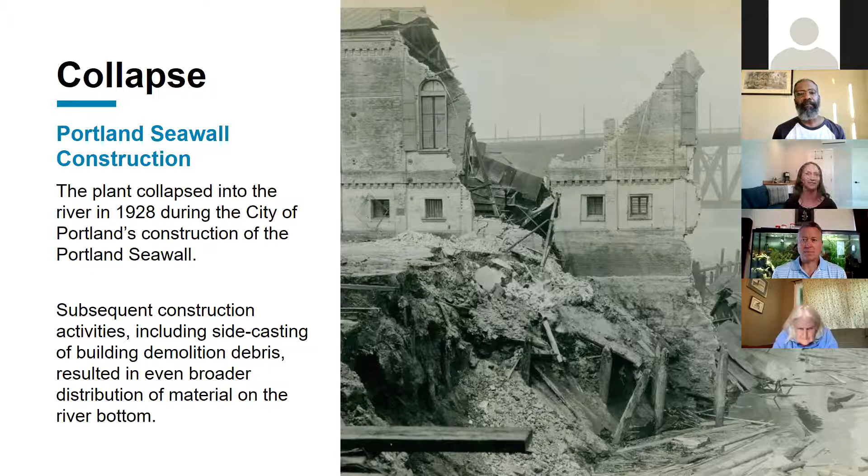And it was just left there over time.

So now I'll go into a little bit of the DEQ selected remedy and permitting. Following all those investigations to look at nature and extent, DEQ reviewed and considered a variety of different cleanup options to address contamination at the site, and ultimately issued a final cleanup plan, or record of decision, in November of 2016. The selected remedy is shown here in this figure, and it's a bit unique in that it involves a blend of a variety of different remedial technologies.

It addresses the most highly concentrated sediment contamination and tar deposits through removal and capping. These are the areas shown in red, pink, and orange. Red was full removal. Pink was removal of that tar body material and placement of an amended cap. And orange was dredging to allow for placement of an armored cap.

It also incorporates in situ treatment in a couple of areas, one being the depositional area along the seawall shown in green, and also an offshore area where surface concentrations were fairly low but some buried contamination did remain - that's the area labeled D, offshore. And then it also relies on, or enhances, natural recovery that's ongoing, which has been happening for many decades here.

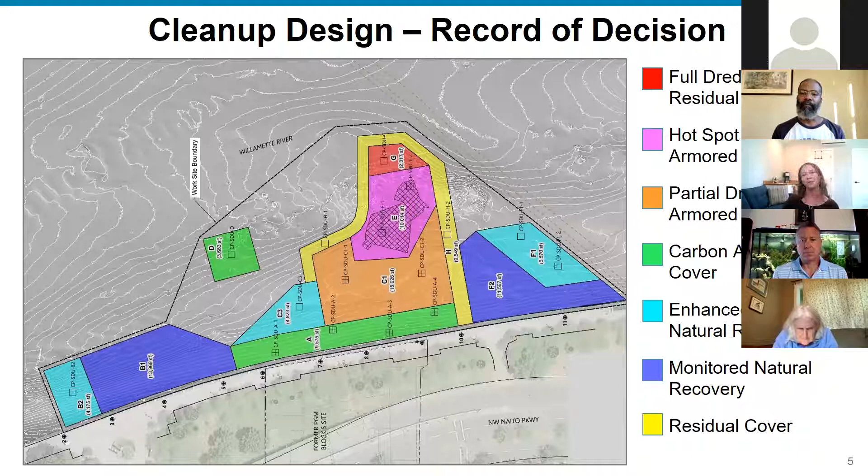So once DEQ selected a remedy, we go into the design phase. This is where Northwest Natural and their contractor spend a lot of time working with their engineers and technical experts to prepare detailed design drawings, specifications, and reports that outline exactly how the remedy will be constructed. I don't expect you to be able to read all the tiny print on this cross section - it's kind of challenging - but it's just one example of what you might find in a design report, and I think it does a good job of highlighting some of the key considerations that had to be accommodated in design.

As we talked about, on the left we've got the seawall. It's an old historic wooden seawall owned by the City of Portland, and the condition was unknown, so we had to avoid disturbing it during construction. There's significant sediment deposition along the wall that can be relied on because it effectively works as a natural cap in that area - you can see that steep slope starting from the wall and going down into the river.

And of course, you need to make sure the remedy provides sufficient draft for Fleet Week vessels - you need to still allow those vessels to come and go and berth as they have for a long time now on an annual basis. And due to the presence of the surficial tar deposit, it was a priority to make sure all of that material got removed. It's a little hard to see, but there's an area down in this third panel at the bottom where you can see a gray surficial line showing where that tar deposit is.

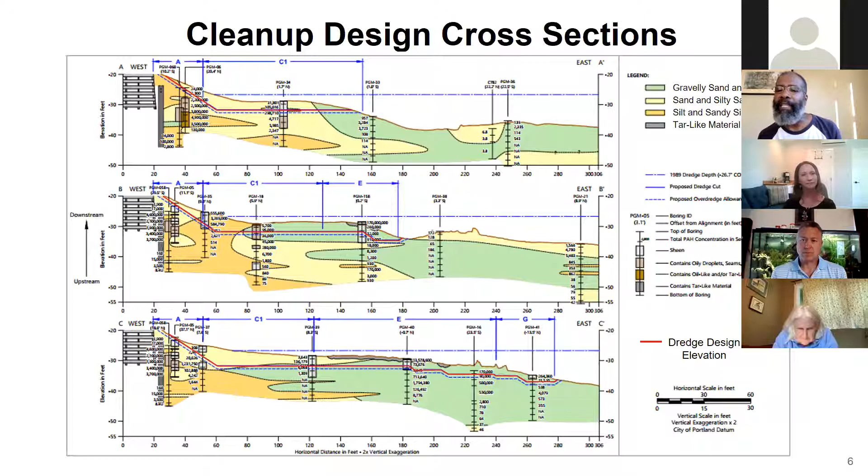And then there was one more question about what caused the collapse of the building in the previous photo, the earlier photograph. Was there any knowledge on what caused that collapse of the building?

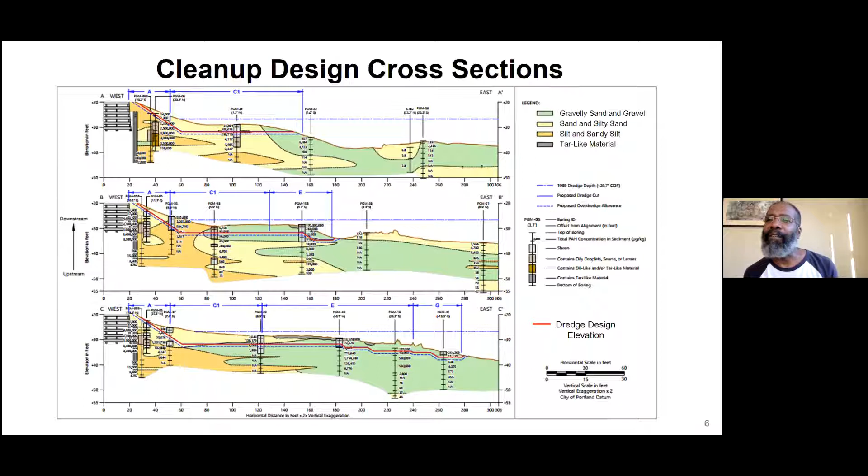Yeah. When they dug the foundation for the seawall, they dug into the bank, and structures that were on the bank at that time basically were demolished and fell into the river. And those structures just kind of stayed in the river, more or less. We have some interesting photographs from divers that were evaluating the site before the cleanup that showed parts of walls that still had windows in them that we could match to the photos when they were above ground. So I'll show you some pictures of some debris that we took out a little bit later in the presentation to give you a sense of what was down there.

Fantastic. Thank you so much. Thanks, Sarah. Thank you. All right.

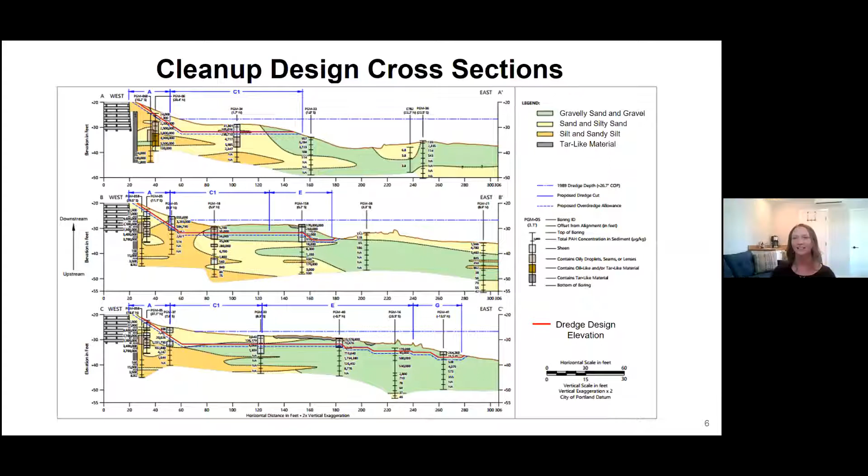And then that's kind of the active treatment portion of the cap. And then of course you need to make sure that cap remains in place over time. So it was overlain by a minimum 1 foot armor layer, which in this case consisted of stone with an average diameter of 3 to 4 inches. That stone was designed to ensure the material stays in place when subjected to a variety of different forces, including high river flows, vessel wakes, and it also considered movement from seismic events.

So DEQ finally approved the complete design package in October of 2019, and that really kicked off the permitting process, which is a really complex, multifaceted process that's critical to getting your project into construction. It requires coordination with a variety of different permitting agencies to make sure that work complies with federal, state, and local requirements, particularly for the protection of cultural resources, historical resources, water quality, endangered species, public trust uses, and future land uses as well.

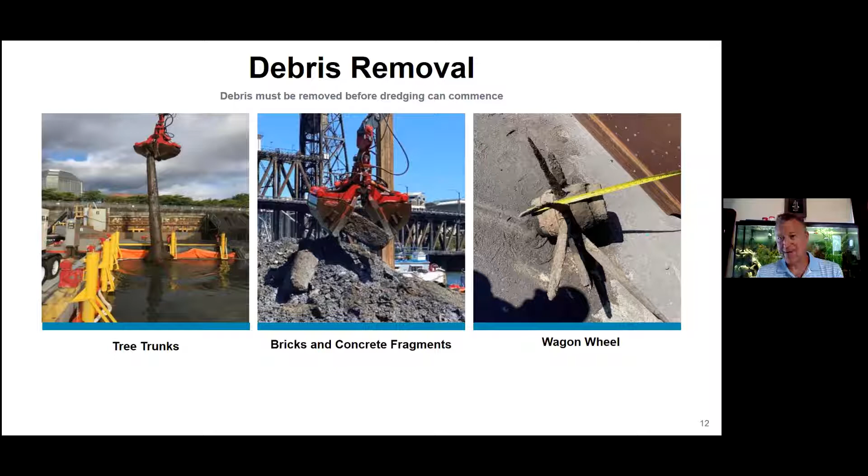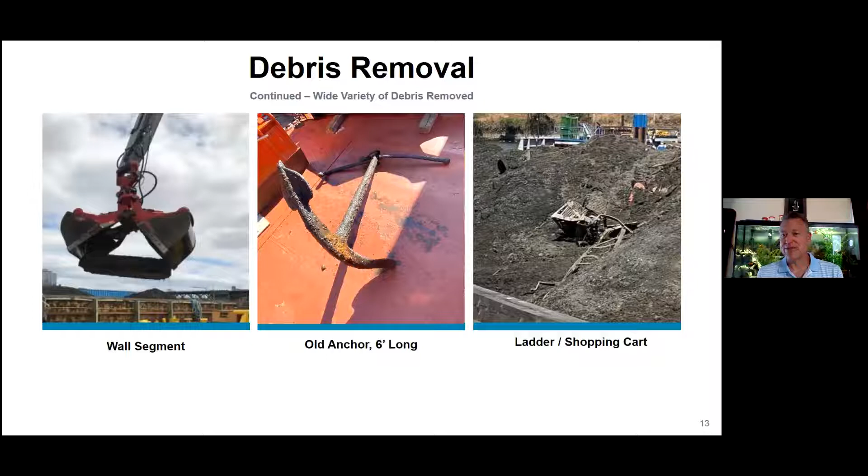On the left here, you can see a portion of the wall—that's one of the walls we were able to retrieve intact from the bottom. We also found an old anchor, and there was a lot of modern debris too: ladders, shopping carts, bicycles, and things like that. We even found an old safe that was open.

When we were doing work, several times a day we would collect water quality samples in the downstream or down current direction. Sometimes that was towards the Columbia, sometimes towards the falls, but we always knew which way the river was going, and we compared results against the background station at the time. We were very successful with that water quality program. We had no water quality issues at all during the entire project.

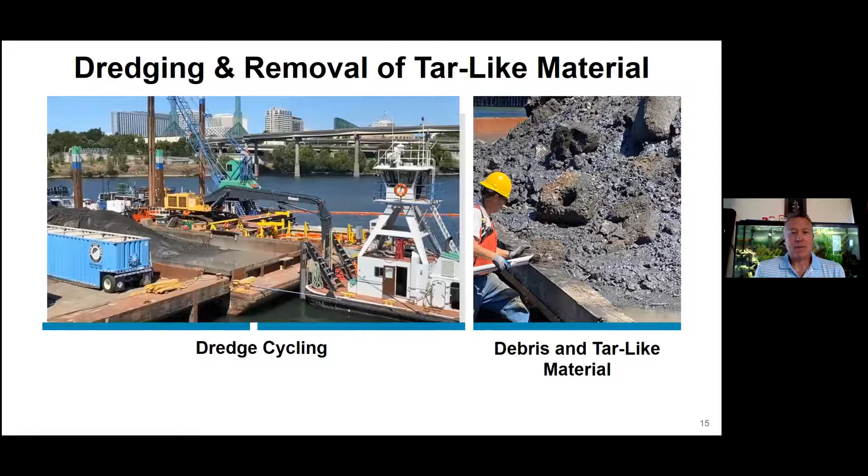We had a surprise, and this happened just a couple weeks after we started work. One of our operators was out in the morning after our first day of dredging and found some ammunition laying on the moon pool platform. We paused. We needed to find out what it was. It turned out to be World War II munitions, and that was unexpected.

We had to identify what type of munitions they were, and determine whether or not we could continue to work safely, both as operators and from a public safety perspective, before we could resume any work. So we worked really closely with Sarah and her team at DEQ to try to figure out if we could keep going on this project.

These were 20 millimeter rounds and a rifle bullet. You can see two 20 millimeter rounds and the bullet to the right of those. Turns out, as we were dredging, we encountered both practice rounds plus high explosive rounds, as well as incendiary rounds.

After some research, and bringing in some experts in munitions, we determined that these rounds had the potential to have an explosive fragmentation range of about 73 feet. Before we could resume work, we had to make sure we were safe working within that distance and had set up controls to make sure nobody else could come closer than that distance.

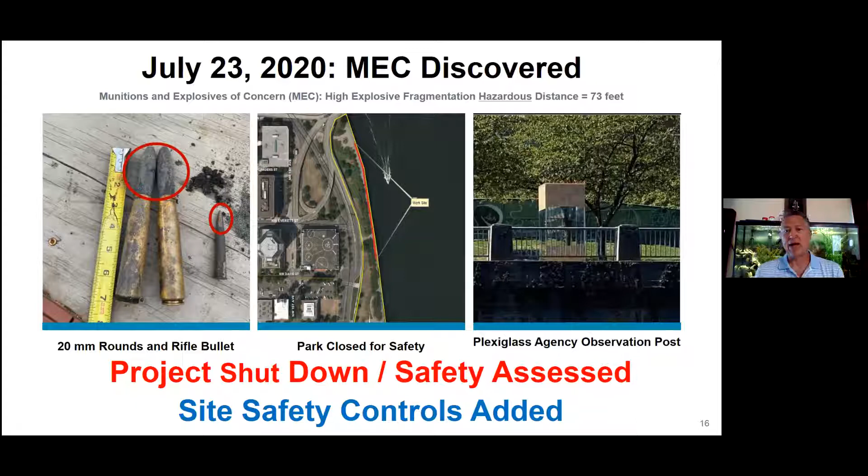But then there was another aspect we had to manage too. Sarah, you can move to the next one. And that's, what do we do with the munitions? We're not allowed to take sediments with munitions into a landfill. Landfills can't accept munitions - there's very strict regulations about that. So we had to sift all of the material that we dredged to make sure there were no munitions in them.

Because some of those 20 millimeter rounds were separating the bullet from the casing, we had to sort and sift all of the dredge material down to 3/4 of an inch. So we had to set up an entirely new station. We did this on the Columbia River on the North Shore, and this was a fifth station that we constructed for this operation.

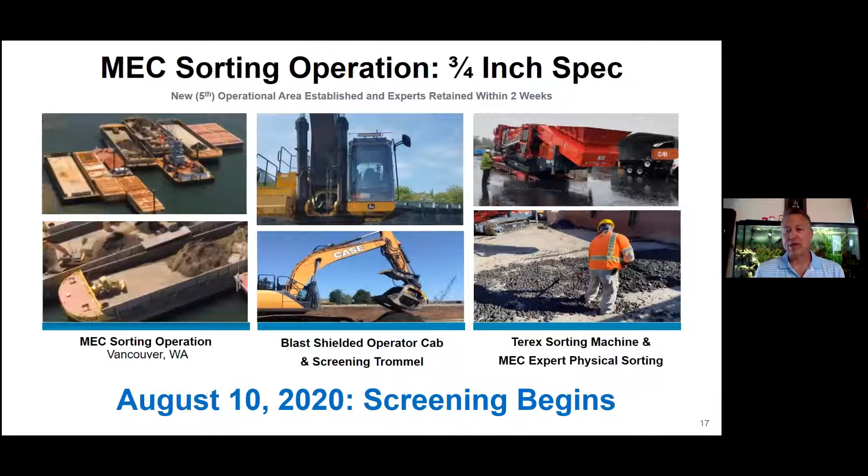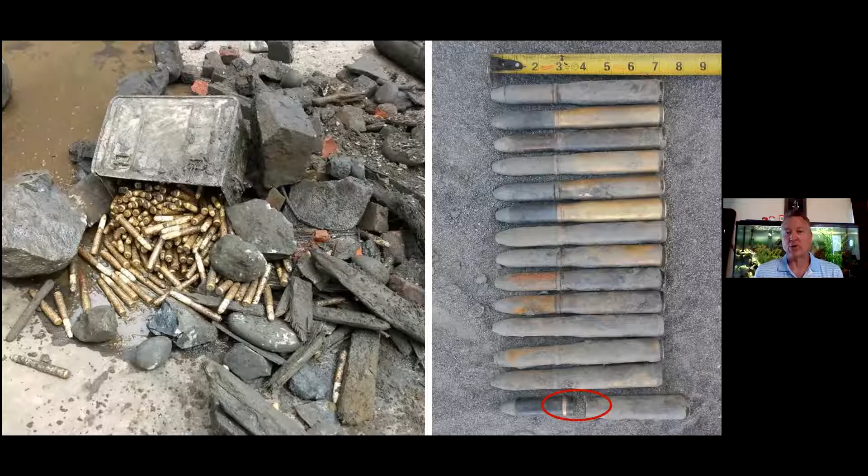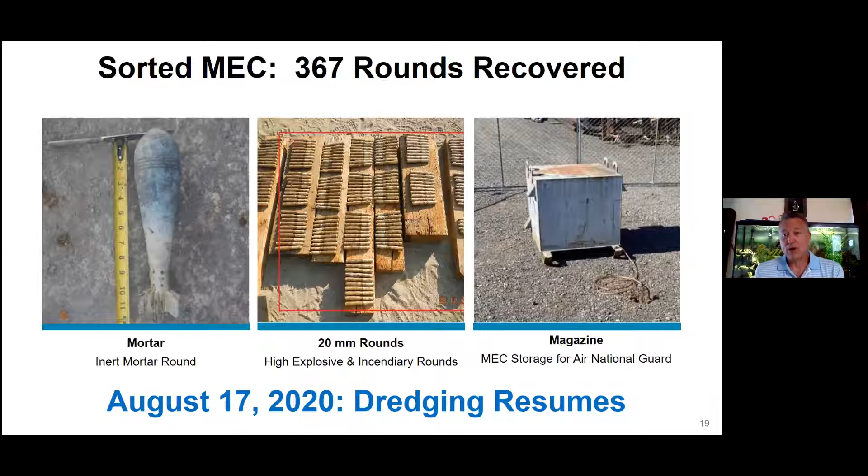We got to the point where we had the Air National Guard coming to pick them up every day, and they basically said they didn't really want to have to come out every day. So we said, if you bring us a magazine, we can start storing the rounds in it, and you can come pick up the magazine when it's full. They agreed to do that, and it worked out really well for everybody at that point.

That was a really challenging issue for us, and I just have to give kudos to the entire team. DEQ was very supportive, very helpful. We could not have worked through this without them really working with us as a team. Both my engineering and contractor team and DEQ is what made all of this successful. It was just a great team effort.

So Sarah had mentioned the tar-like material that we dredged. All of that went to Arlington, but a lot of the sediment we dredged out wasn't hazardous, so we were able to send that to the subtitle D Wasco landfill at Wasco County.

Well, then September 10th hit, and we had another challenge: wildfires. Folks probably remember those days. It was a little scary. Our county was under a potential evacuation notice.

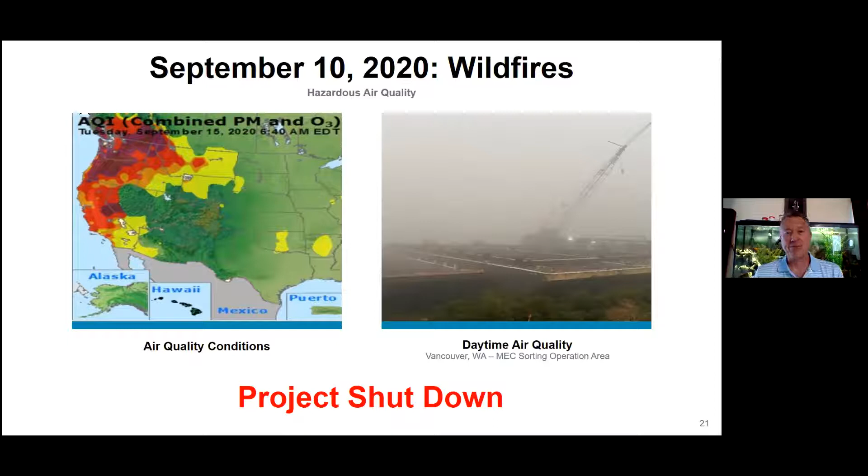It was over a week because the air quality stayed poor that entire time. Around this period, we were all wondering if we'd be able to get the work done before the in-water window closed. Fortunately, we resumed work once the air quality cleared and the wildfires started dying down, on September 21st.

So we wound up submerging the bucket before releasing the capping materials. That turned out to be a very good method for us, because we achieved very high carbon retention with that approach.

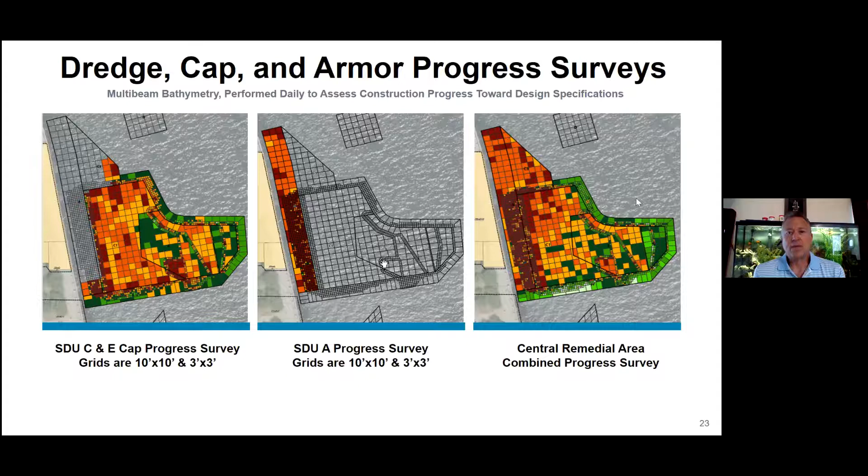Then this is the verification map for capping as well — a similar framework, just different colors showing whether we were putting material down versus taking material out.

Once we achieved the correct depths or heights for dredging or capping, we did a final survey, shown in the next map. This shows the post-construction surface once all the capping, dredging, MNR areas, EMNR areas, and cover areas were complete. This was the project completion figure after several weeks of working closely with DEQ to make sure we did it just right.

And that was October 13th when we received that approval, which was within the in-water work window, which was a great success for us, particularly given the shortness of the window and the number of challenges that were thrown at us during this construction project.

I'm just going to talk about a couple more things very quickly. One is post-construction monitoring. Once we were done building the remedy, we wanted to go out in the same year and make sure it was working right. What were the conditions at the time of completion? We can use this as a baseline for future years of monitoring, so we can always look back and say, well, this is what it was that first year, and compare it to a future point.

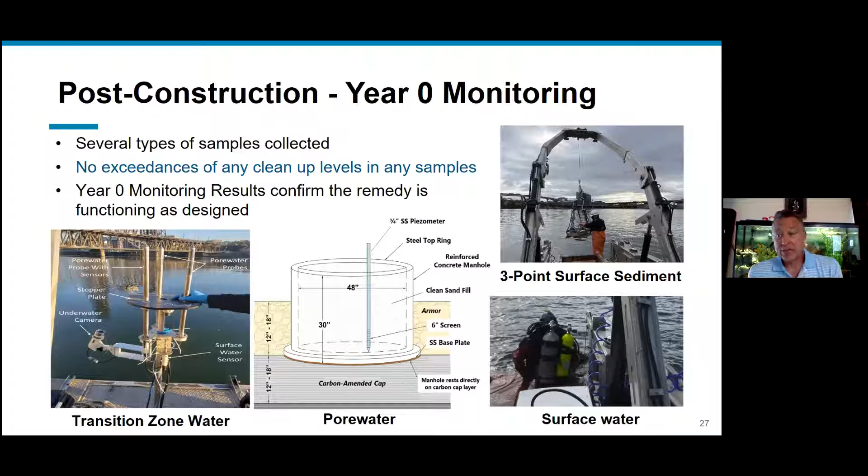All of that sampling showed that all of the remedial elements are working as designed, and we had no exceedances of any of the targets that we had set for this construction project. So we're very pleased with that year zero monitoring event because it shows what we built is working correctly.

And then lastly, I think Sarah and I are going to tag team on this a little bit, but just the key outcomes, thought we'd walk through them for you. I mentioned this before, I don't think I can say it enough: the teams really worked well together. This could not have been successful if we hadn't had a team that trusted each other and relied on each other to do their jobs and do them well. I just can't say enough about that.

We were also successful getting out all of the tar-like material. We were successful getting out everything we wanted to dredge. The moon pool was a success, and that was a really important element of our project. We also wanted to see whether it was going to be successful in the Willamette River, and it was.

We were also able to get all the debris out. And as I mentioned during the slide when I was showing you the person hosing down, the carbon placement was optimal. We actually wound up having more carbon in the cap than the specification called for, because we didn't really lose any during placement. So that was a very good success.

We were able to complete the work within the in-water window. And then just a shout out to DEQ again for all their help in coordinating with the Air National Guard. DEQ also led the public communications efforts and had a blog and everything else. We supported them where we were asked to and where we could, but they did the majority of the work on that, and much appreciated.

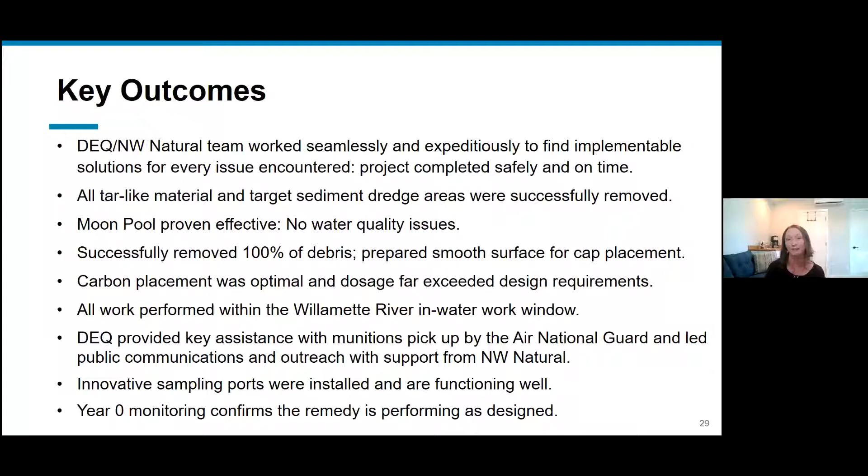Well, all right, that is an amazing story. That was super cool to hear. So happy to know that we had great professionals doing a fantastic job on that. That mortar was, wow. So we do have some questions on the thread here.

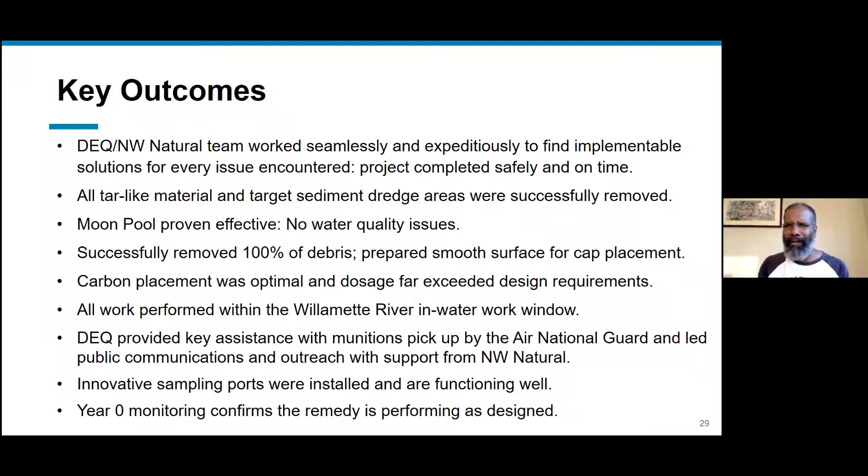Someone had asked: were the residues from the oil gas conversion discharged into the river for many years without treatment? If so, this must have been a real mess to clean up. So I guess that's a question, if it was or not.

I don't know that we have a lot of information on how everything was ultimately placed there. We do know that the tar-like material, which was the thing we had the most concern with, and some of the higher concentration materials in the sediments, were likely deposited when that seawall was constructed and material was cast out into the river when they were putting that seawall foundation in. One thing we didn't mention was groundwater. There is a little bit of groundwater impact in the uplands, which may have been a result of actual operations at the time. But we were able to design a sediment remedy that addresses that issue as well, so the sediment remedy isn't just a remedy for the sediments, it's also a remedy for groundwater from the uplands.

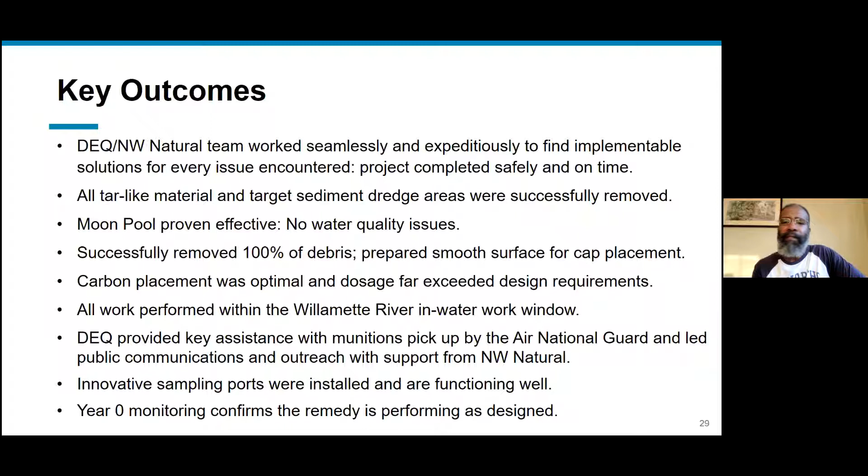There was another question: was there a coffer dam used for dewatering, and was ODFW fish window observed? So we did not have a coffer dam. We used the moon pool for water quality control instead. And yes, we were able to complete the entire project within the in-water work window.

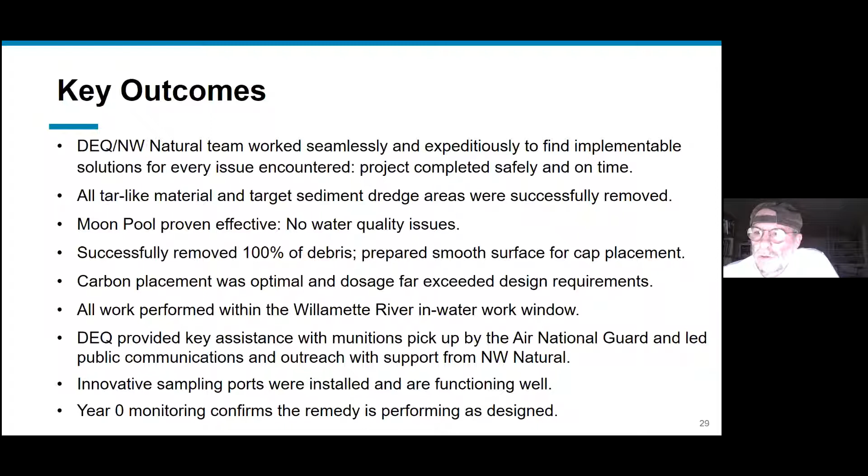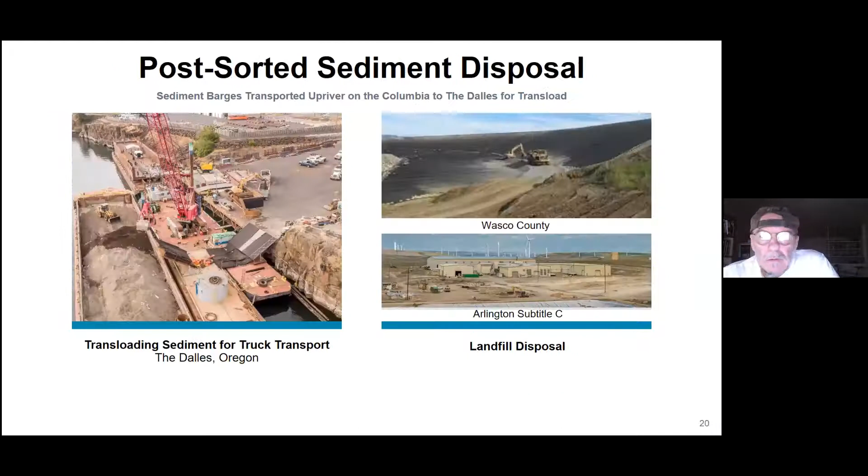No, so the armor is actually a heavier stone that was specified in order to be able to resist the currents that we know are going to happen in the river. The armor is just placed to keep the river from basically disturbing the cap itself. The cap itself is largely sand or sandy gravel, and the carbon is mixed into that and placed before the armor is put on top of it to hold it in place. So there's no concrete involved in the cap at all. Correct.

Quick follow-up: you're going to have Navy ships tying up right on top of the cap, so obviously you accounted for prop wash from the ship that's maybe 5 or 10 feet above the cap. Right, so we know there's a lot of historical information about the ships, and we worked closely with all of the parties, including the harbor master, that deal with that. When the ships come in, they use what's called a breasting barge - they bring these barges in and tie them up against the seawall, and then the ships are tied against those breasting barges, not up against the seawall itself. That gives us a distance, and we were able to use that breasting barge width to make sure we have a robust cap where we needed it, and achieve the depth necessary for the vessels to have enough draft where they'll actually reside once brought in. They're largely pushed by tugs as well, so their screws usually aren't driving them once they get that far up the river.

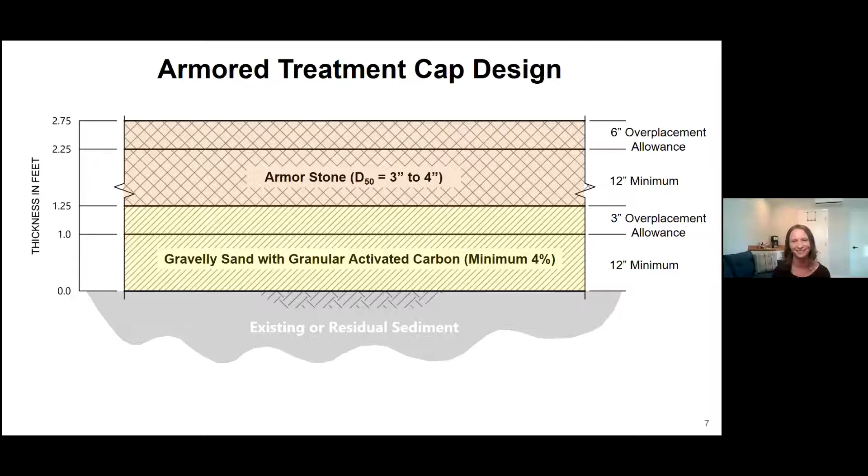And then there was a question about caps with windows to check their effectiveness. Could you elaborate on that? And do all caps have this feature? So no, not all caps have this feature. This is a new design idea that's only been used at a couple of sites around the country so far.

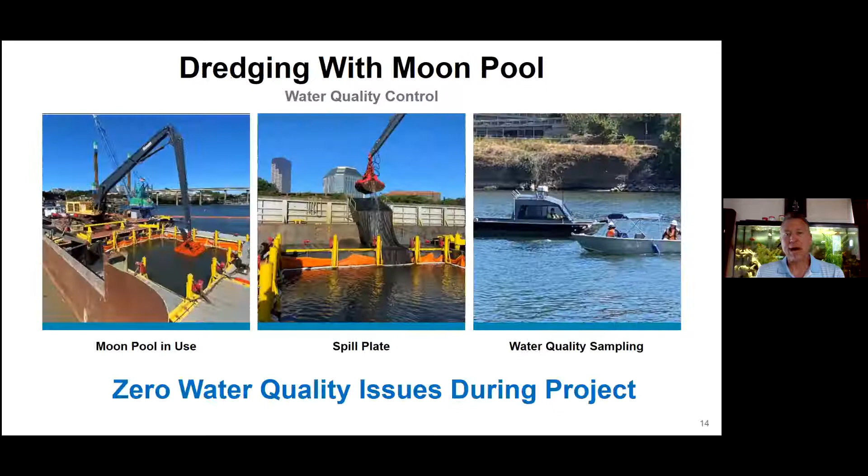And in that sand are embedded probes, and the probes have tubes that come out of their ends. So we can send a diver down, and what they do is attach a sampling device to the tubes that come out of that straw. The water they pull from those tubes is drawn from the probe ends that sit right on top of that gravelly sand with the carbon. So the water samples collected by those divers are not from the armor, and they're not from sediments deposited on top of the armor - they're from the top of that active cap material.

The reason we want to sample right there is because if there's ever any breakthrough, we want to see it as soon as it happens, and that's the best way to do it. It means that every year when we go back and sample, we can reproduce the location, both laterally and vertically, from where those samples are collected to make sure the comparisons are apples to apples.

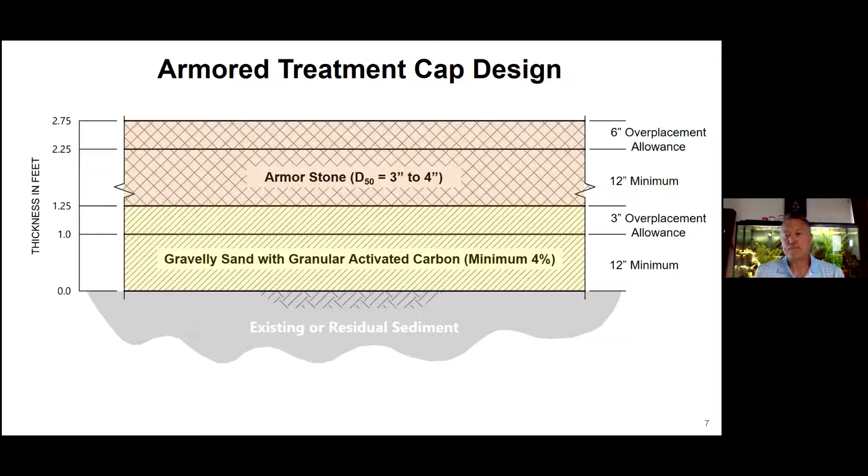Well, we did have a layer of material that was tar-like, and as Sarah mentioned, we did dredge all of that out. The other tarry material that we removed was back in 2006. That was work we did for EPA under an EPA order for early action, where we removed tar from that site as well.

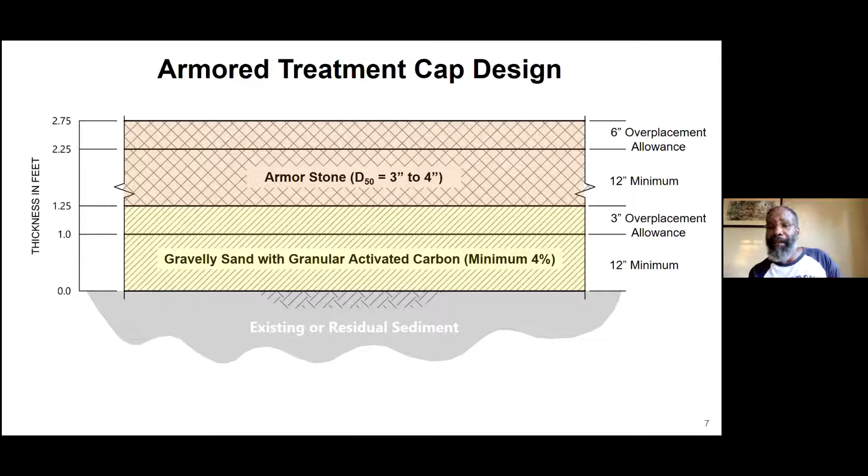I would just like to quickly thank Sarah and Bob. That was a fabulous presentation, that was complicated material, and most of us on the outside have no conception of how complex what you're doing is. You helped our understanding of that enormously, so thank you. Well, thank you very much.

There are lots of thanks for sharing what you've done, and a lot of gratitude for the obstacles and challenges you were able to successfully see through. People are very interested in the cleanup, very fascinating, happy to hear it's a success story with all the challenges with fires, pandemics, and ammunition. So thanks once again for that presentation. It was very, very interesting, enlightening, and I love all the new tech you guys are using for that site. This gets us psyched up about what's going to happen in the rest of the river when we get all these signatures in place. So very, very excited to see.